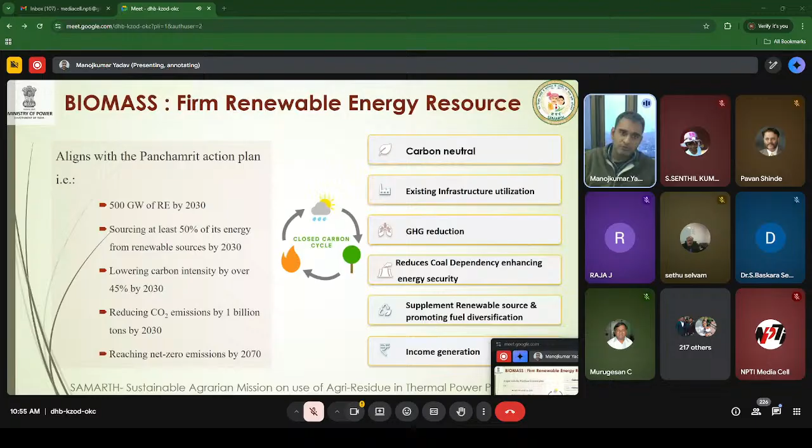और बायोमास का दूसरा नुकसान है जो जलाते हैं, उसको भी टैकल कर पाएंगे हम. और इस प्रोसेस में फार्मर्स के लिए और अदर स्टेक होल्डर्स के लिए एक इनकम जनरेशन का भी सोर्स है. सो दिस वाज द क्रक्स कि हम व्हाई वी आर मूविंग टुवर्ड्स बायोमास कोफायरिंग.

फिर क्वेश्चन ये भी आ सकता है कि भाई अगर बायोमास से ही कोल रिप्लेस करना है, तो हम एक पूरा ही बायोमास का प्लांट क्यों न लगा दें, व्हाई वी आर नॉट. तो एक है कि इंडिया का जो इंस्टॉल्ड कैपेसिटी है दैट इज अराउंड 217 गीगावाट थर्मल पावर प्लांट, 17-18 गीगावाट का है. अब ये एक बहुत बड़ा इंफ्रा है, आप इसको ऐसे वो नहीं कर सकते.

इसको बनने में भी बहुत टाइम लगा, ओवर द पीरियड ऑफ 50-60 ईयर्स वी हैव ग्रोन। तो इसको आप इतना जल्दी रिप्लेस नहीं कर सकते, और एग्जिस्टिंग इंफ्रा है, उसमें कैपिटल इन्वेस्टेड है।

बेस लोड के लिए अगर आप ग्रिड ऑपरेशन पॉइंट ऑफ व्यू से देखें तो आपको थर्मल पावर प्लांट और हाइड्रो प्लांट्स की रिक्वायरमेंट है, क्योंकि जो रिन्यूएबल है उनके कुछ चैलेंजेस हैं जिनको हम थर्मल और हाइड्रो प्लांट्स यूज करके कैटर कर सकते हैं। तो ये हमारी रिक्वायरमेंट तो है ही।

तो हम 100% फायरिंग के बजाय को फायरिंग करें तो उसमें हम एग्जिस्टिंग इंफ्रास्ट्रक्चर यूज कर सकते हैं। 100% अगर नया पावर प्लांट लगाना है तो पहले उसका लैंड इंफ्रास्ट्रक्चर पूरा नया से शुरू करना पड़ेगा, और इनका कंप्लीशन पीरियड भी बहुत बड़ा होता है, तो बहुत टाइम लग जाएगा। मतलब इम्प्लीमेंटेशन विल बी ए चैलेंज अगेन।

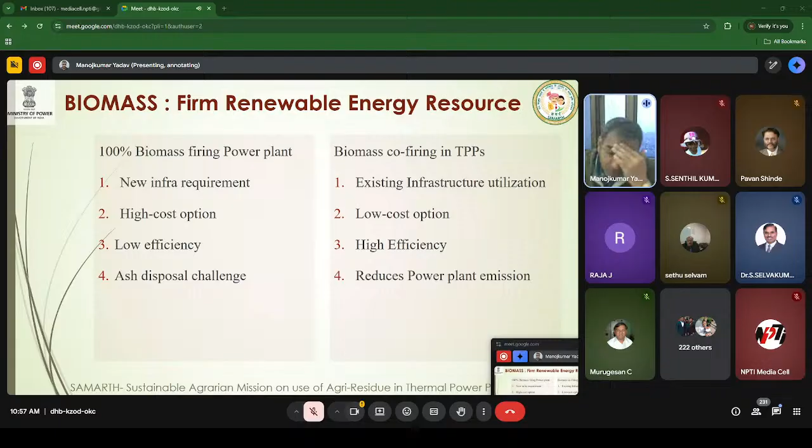ये एक हाई कॉस्ट ऑप्शन है क्योंकि आपको जीरो से स्टार्ट करना पड़ेगा, एफिशिएंसी भी लो रहती है, और उसमें एश डिस्पोजल के अलग चैलेंजेस हैं। जबकि आप एग्जिस्टिंग थर्मल पावर प्लांट में यूज करोगे तो जो एमिशन का प्रॉब्लम है, जो ग्रीन हाउस गैस एमिशन की हम बात कर रहे थे, वो आप कैटर कर पाओगे।

जस्ट टू गिव अ आइडिया कि इंडिया का बायोमास का जो अवेलेबिलिटी है वो कितना है। अगर आप देखें तो ये 2019 का डेटा है, 230 मिलियन मेट्रिक टन ऑफ सरप्लस बायोमास जनरेशन है।

अभी मिनिस्ट्री ऑफ पावर ने एक और स्टडी कराई है जिसमें इट इज स्टिल नॉर्थ ऑफ 200 मिलियन मेट्रिक टन पर एनम जनरेशन है बायोमास सरप्लस का। तो कहने का मतलब है कि इट इज गुड इनफ। जो हमारा ऑब्जेक्टिव है को फायरिंग का, उसके लिए सफिशिएंट बायोमास अवेलेबल है।

अगर पूरा इंडिया का जो इंस्टॉल्ड कैपेसिटी है कोल बेस्ड थर्मल पावर प्लांट का, वो को फायरिंग स्टार्ट करे एट 5%, तो उनको ऑलमोस्ट 40 मिलियन मेट्रिक टन पर एनम जैसा लग जाएगा। विच इज मतलब 20% से भी कम है जो सरप्लस बायोमास अवेलेबल है।

तो द पॉइंट इज कि रॉ मटेरियल का इशू नहीं है इस केस में, जो हम इस डायरेक्शन में मूव कर रहे हैं। ये जस्ट आइडिया देने के लिए है कि अगर इंडिया को फायरिंग 10% बायोमास में स्टार्ट कर देता है, तो अलग अलग स्टेक होल्डर्स इन्वॉल्व हैं, जैसे फार्मर्स, पैलेट मैन्युफैक्चरर्स, थर्मल पावर प्लांट्स - सो हाउ मच इन टर्म्स ऑफ मनी, हाउ मच इज द मार्केट।

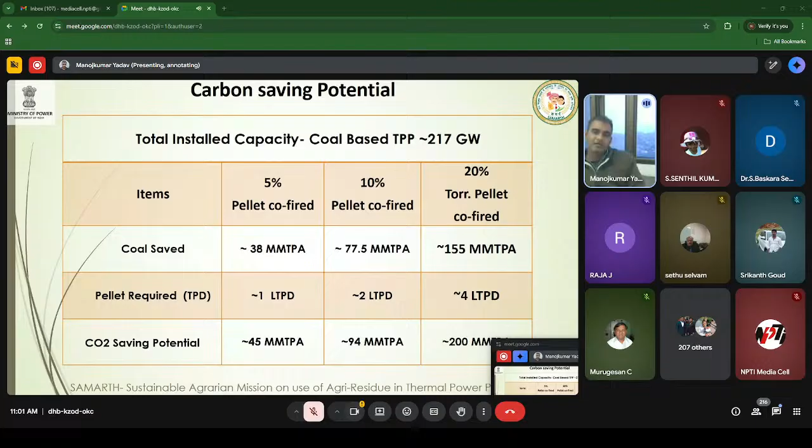अब हम आ जाते हैं policy पे। मैं एक request करूंगा, जो मेरे बाकी presenters हैं, policy mostly मैं cover कर लूंगा। in case आपको ऐसा लगता है कि ये repeat हो रही है आपके presentation में, तो आप उसको थोड़ा सा skip कर सकते हैं, so that हम to the point बात करें और time को optimize कर पाए।

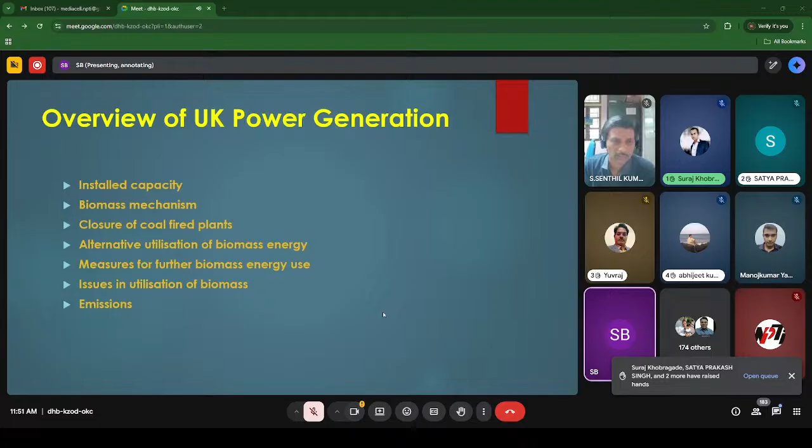If you see the UK's installed capacity, it's roughly 70 to 75,000 megawatts in total. Initially, the coal-fired plants in 1996 comprised about 25,000 megawatts, and slowly it has come down to only 5,000 by 2020.

Now in 2025, no coal is being used here in the UK. The data is not available after that, so I couldn't add it. So there is no coal, and the oil fired is the one shown in yellow, and the gas fired, mostly combined cycle power plants, and some mixed and dual fuel fired plants which are thinning down over the period, and nuclear stations which are more or less the same, roughly 4,000 to 5,000 megawatts. Then hydro, which is smaller, and pumped hydro, onshore wind, offshore wind, wave and tidal, solar, and the red one is biomass.

From 1996, it was very, very small, but over the period the share has increased considerably. Some of them, like other biomass fuels, are waste energy fuels which we are using here at the top. So this is the trend you can see here.

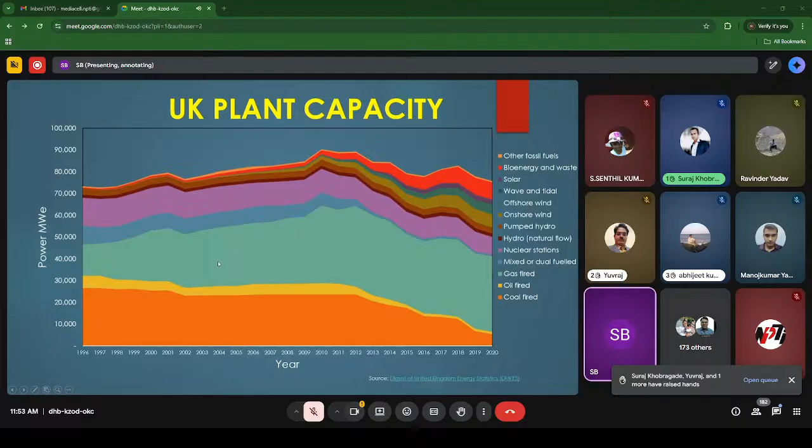And this is the fuel which is currently on that. There's a grid which is there. If you go to the UK grid, you can find out the current amount of power generation.

Currently, even though we have about 75,000 megawatts, the demand is only 26,000, maybe 27,000 megawatts roughly, and out of which the renewables are contributing about 43%, which is 11.5, and some carbon neutral sources giving 12.25 gigawatts. That means the carbon emissions have been considerably coming down, almost 89% of the projects coming from carbon neutral basis.

The nuclear is 3,600 megawatts, combined cycle 14,300 megawatts, and biomass is 2,870 megawatts, which comprises about 11%. This biomass is working more or less as a base load, and over the day as we progress from morning 6 o'clock to 12, this load will increase and reaches about 50,000 megawatts.

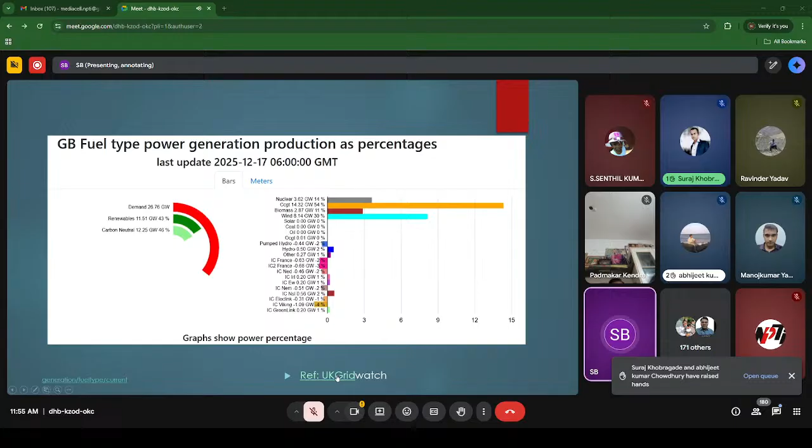Whatever I explained, the same thing is here in a kind of dial, and you can see from here the demand, renewables, carbon neutral fuels, nuclear, combined cycle, biomass, wind, and solar, and all sort of thing.

Because it's morning, there's no power generation from solar. In coal, there is none, and oil, there is none. Open cycle, there is no power. Pump storage is being used for pumping, that's why it's showing negative at the moment. And hydro plants are giving about roughly 500 megawatts. So that's the kind of situation.

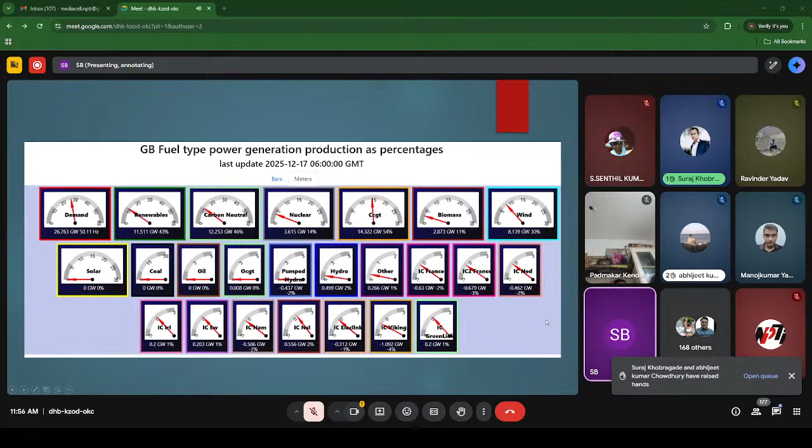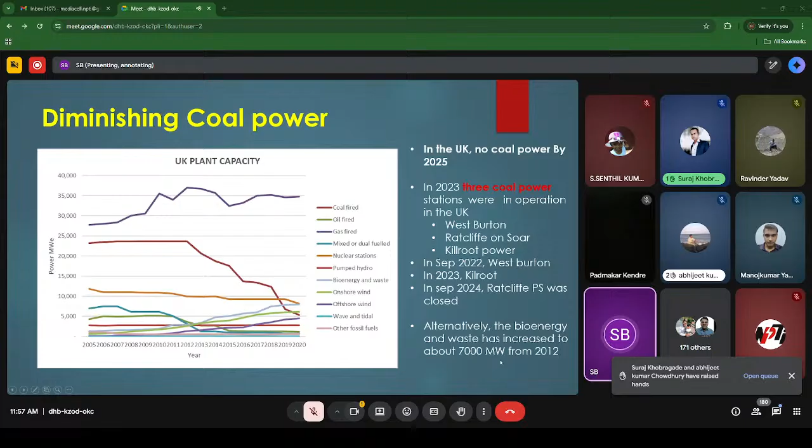As I mentioned, there is no coal power in the UK as of today. There were only 3 power stations: West Burton, Ratcliffe, and Kilroot, and all the plants have now been shut down. The biomass and waste has increased now to 7,000 megawatts since the 2012 figure.

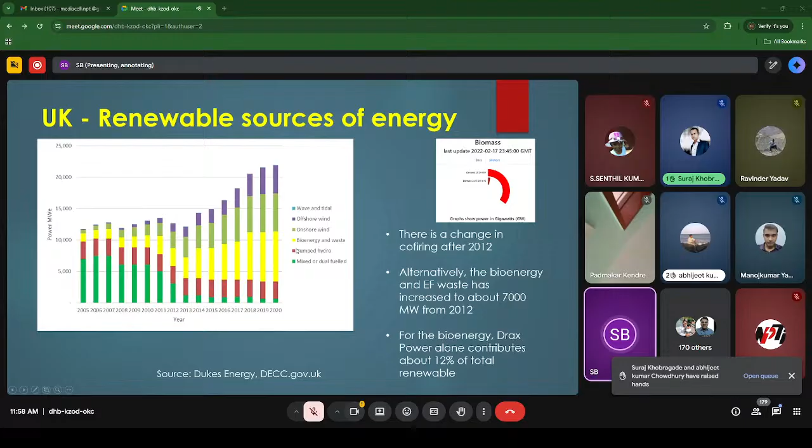UK renewable sources, if you see here, biomass is not considered only a renewable source, other than the bioenergy which is there. If you see that yellow one, the total contribution has considerably increased over the years from a smaller amount in 2005 to 2020.

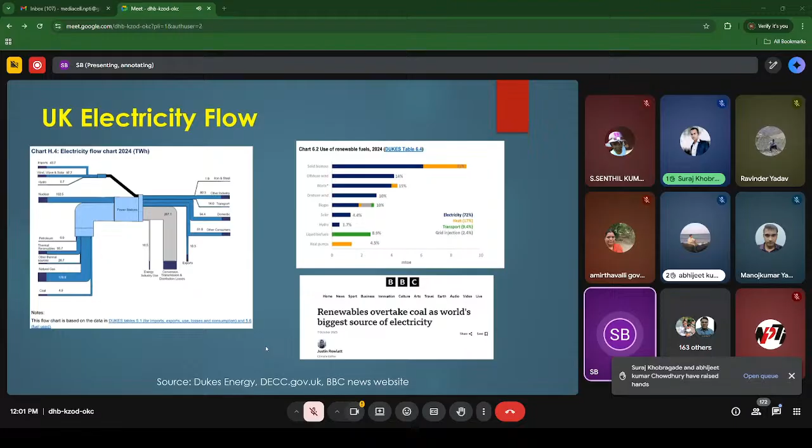If you see this BBC report, renewables overtook coal as the world's biggest source of electricity on 7th of October 2025. That means all the energy generation coming from renewables is constantly changing from coal, and this is also evident from the various agreements provided at COP30 and other conferences, where they are increasing the use of renewables to mitigate carbon dioxide emissions and improve the situation on global warming.

So we have discussed all of that, so I'll just skip this.

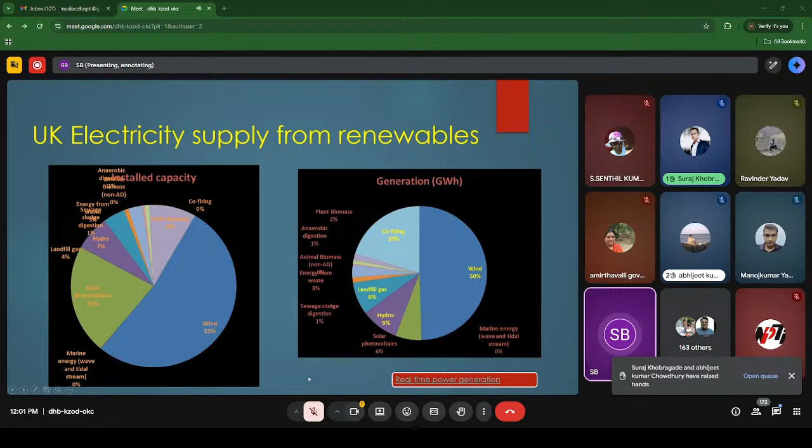In terms of co-firing technology, many people would have discussed this earlier. There is direct firing, indirect firing, co-firing, and dedicated firing. In the UK, we have worked mostly on co-firing and dedicated firing technologies, and hardly use direct firing, though we have used some projects on indirect firing.

Let us talk about direct co-firing. You take the coal from the bunker and the biomass, and use it in the same coal mill. The mixture of coal and biomass is put together into the coal burner, and that burner is combusted in the boiler so the energy is used. But you have to note that this biomass is without any processing, so whatever you are collecting, you are collecting it with the coal milling.

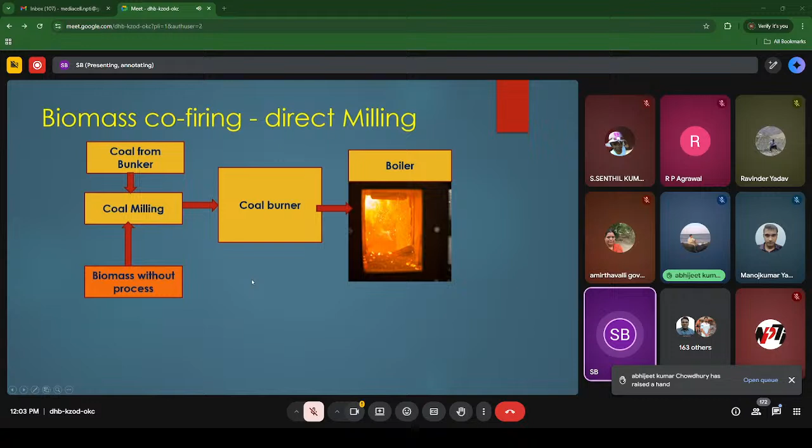But coal milling has certain characteristics for milling coal. If you are putting the biomass without any classification, it is not that effective. So direct firing is considered only for very low quantities, whereas the biomass involved is not that much in terms of quantity.

In co-firing, biomass milling is done separately and coal milling is also done separately, and the milled products are passed through the same burner, which is a biomass and coal mixed burner, and then it will be passed to the boiler.

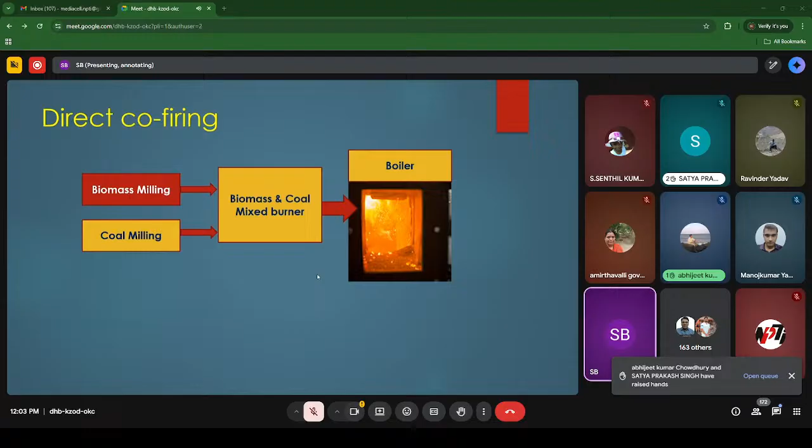Dedicated biomass burning is generally being envisaged. In most of the projects I've been involved in, we have used dedicated biomass co-firing because we wanted to achieve roughly about 20% co-firing in the 500 to 600 megawatt range. For that purpose, we need roughly about 100 megawatt generation from the biomass, and separate milling is needed for that.

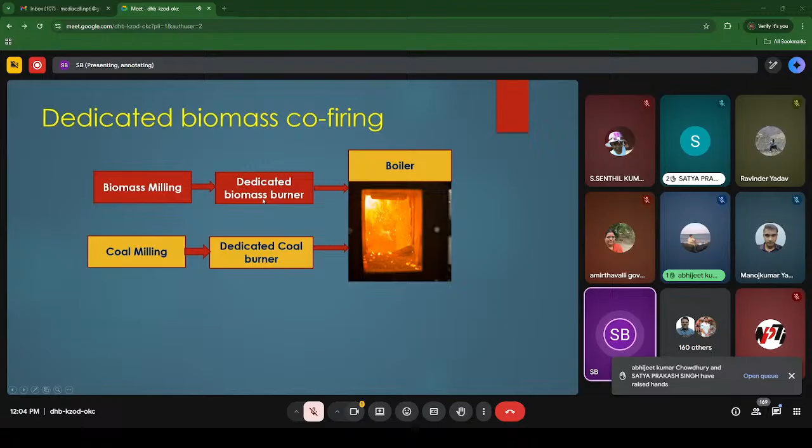The milling is different from coal milling because coal mills are not suitable for such a large volume of biomass milling. So separate biomass milling is there, and all the milled biomass is stored in a dedicated silo, then passed through a dedicated biomass burner, while the coal milling, as in a usual thermal power plant, goes to the coal burner. So the layer of the burner is introduced within the same furnace, and some modification is needed to accommodate this dedicated biomass burner for the power generation requirement.

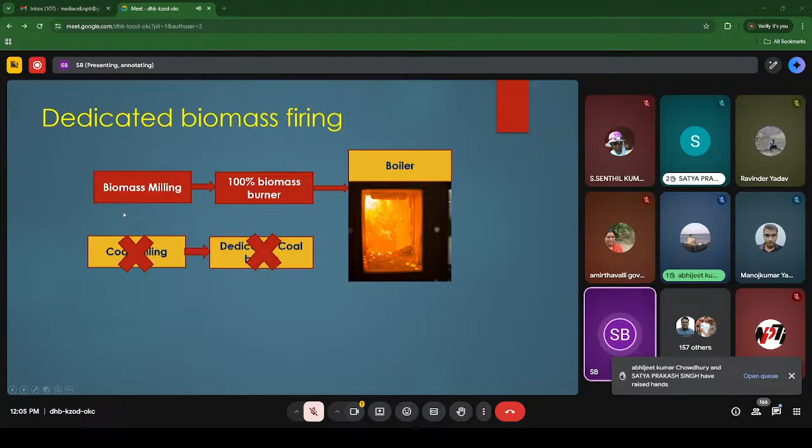In dedicated biomass firing, which is commonly used here currently, we completely take out all the coal milling and coal burner, and instead use 100% biomass milling and 100% biomass burner, which is currently being used in one plant in the UK.

When you are considering co-firing options, the factors you need to consider are: if you're retrofitting an existing power plant where the plant is already online, versus building new plants, you have to consider these factors separately.

Retrofitting an existing plant is cheaper, allows limited co-firing, and offers a quick turnaround for modifications, where you can have a plant coming online very quickly.

You need to carry out biomass characterization, which is critical, because most of the time whatever you're testing at the time of utilization will be different from what you're actually using at site. So you need various biomass collections, analyze all the biomass and their ingredients, what they contain, and then appropriately use the technology and combustion systems to cover this.

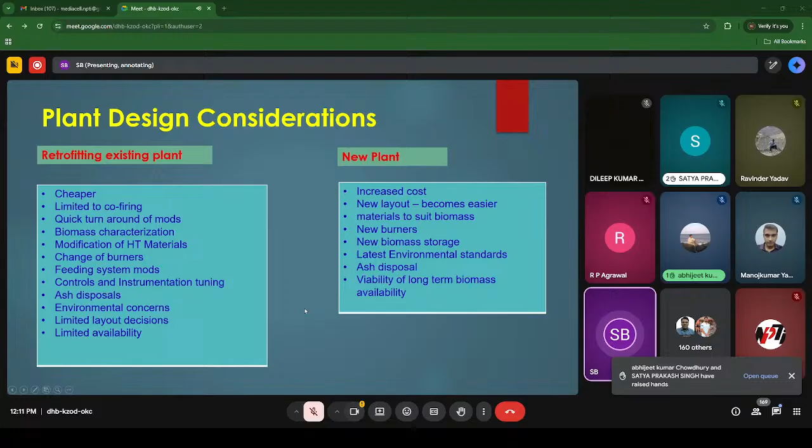The only thing you need to watch is the long-term availability of biomass, because sometimes biomass availability can be an issue, as it may be available only in certain seasons and not in others. So you need to execute long-term contracts, and that will be the key for biomass.

There are some issues and remedies we've addressed, basically biomass sourcing. As I mentioned in my previous slide, that may be an issue. You need proper sourcing mechanisms ensuring the biomass characteristics match your plant, and considering availability—if it's available, is it easy to transport or not? That's another issue.

Sometimes you need to take the fuel from the source, which may be hundreds of kilometers away, and the transportation cost for taking out that biomass source may be very high, and that will be affecting your project as well. Based on this, you need to see the economical and financial efficiency of the plant when you're converting into biomass co-firing.

Within the plant, what we have done is we collect the biomass and develop the nature of the fuel in terms of physical and chemical characteristics, check with the existing layouts and plant equipment, and check the suitability of that fuel for the thermal and mechanical aspects of the boiler, the heat generation, heat pickup, and then determine what components need to be replaced and what can be used without much replacement.

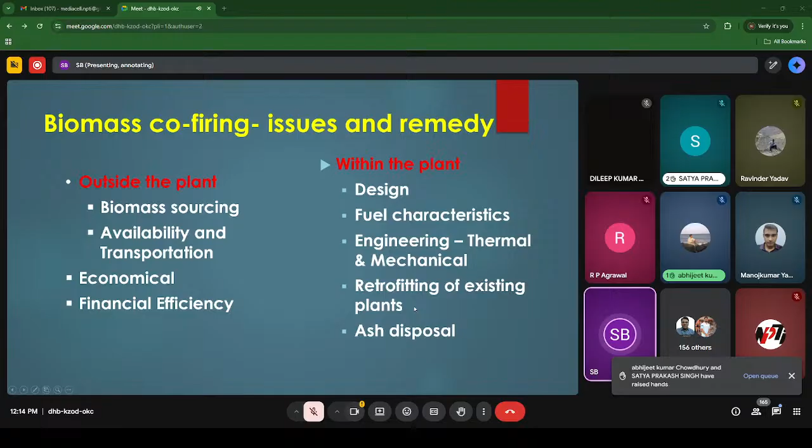When you're converting to this biomass co-firing plant, the basic list is you have to do some due diligence on where you're getting the source, what kind of contract it is, whether it's short term or long term, and how you ensure the characteristics are being matched, and all the fuel-associated diligence you need to carry out.

When you are doing it with the existing plant, you need to carry out hazard and operability studies and hazard identification, so that when you're using the biomass, you understand how it impacts the safety of the people, safety of the plant, and safety of the components, as well as safety of the environment. You need to identify and mitigate any issues identified, keeping risk as low as possible in terms of any hazardous situations.

You need to check the layout and introduce the biomass storage. You need a new pathway for bringing the biomass to the site, developing, delivering, and storing it, then going for the milling. After milling, you need some storage, and then it will be passed through to the different burner arrangements. So you need proper asset management on this.

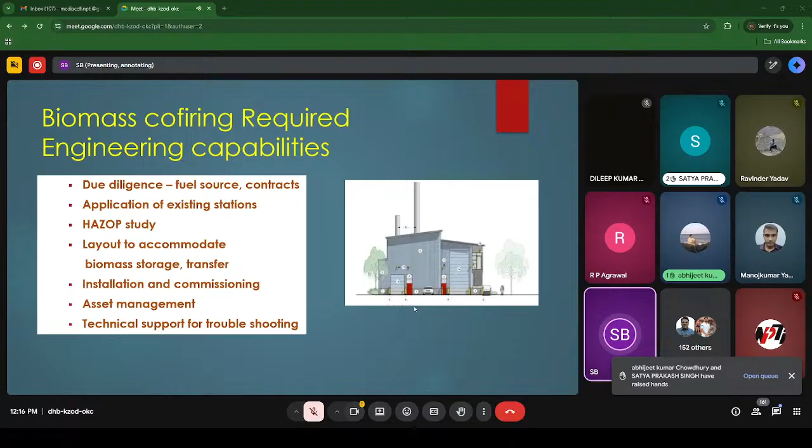When we are using biomass in the UK, since we don't have only dedicated biomass firing, for fuels coming from waste we characterize both, and then try to use them as much as practical. I consider this slide as biomass-based fuel.

When you're going for biomass, you can have combustion, pyrolysis, gasification, and biogas anaerobic digestion — those are the areas you can use biomass. For waste, you can use combustion, or instead of pyrolysis you can go for incineration or gasification, and the remaining waste which can't be processed further goes to landfill. Even some waste can be used for biogas generation.

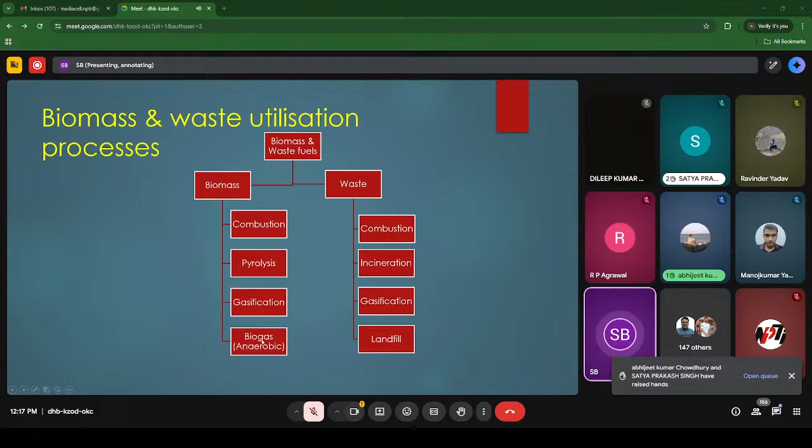When you're co-firing biomass with other fuels, it can be chips, logs, pellets, pulverized — all sorts of forms you can use. When working with coal-fired plants, most coal-fired plants in India are pulverized fuel based, and some are not, but they can be used with chips and pellets. All you need is to match the existing burner arrangement and combustion arrangement. You may collect it in terms of chips or anything, but you need to make the pulverization suitable for the conversion.

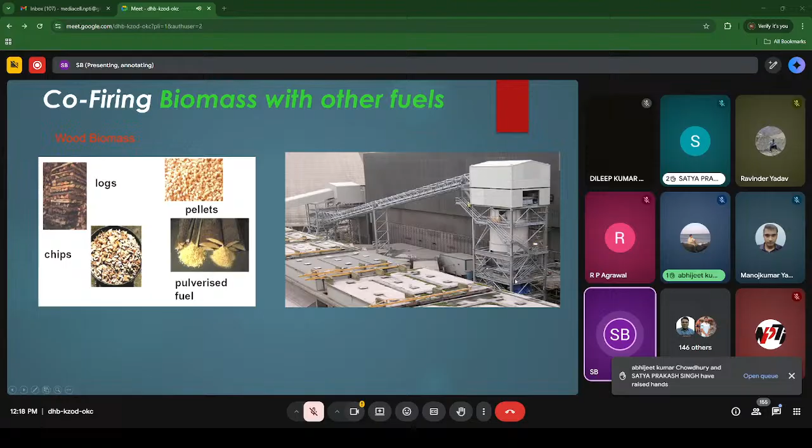In this picture, you can see the biomass coming in, and then it will be carried over and put into storage, and that storage will be used again for milling and other purposes.

I worked on a few projects. One is called Fiddler's Ferry, where we have 20% co-firing, and another Ferrybridge where we have 20% co-firing. I also worked for Drax, which is 100% biomass conversion, and did some studies on Longannet, Aberthaw, and Ratcliffe power stations in the UK. But those plants are now closed. Even though closed, I want to give a glimpse of how this is done at Ferrybridge.

This is the boiler and this is the furnace. In the existing furnace, there is a burner box with a tangential firing arrangement, so the burners are located across tangentially, and the pulverized fuel pipes pass through and take it to the burner box. A number of burners are arranged there, used for combusting the pulverized coal, fired tangentially.

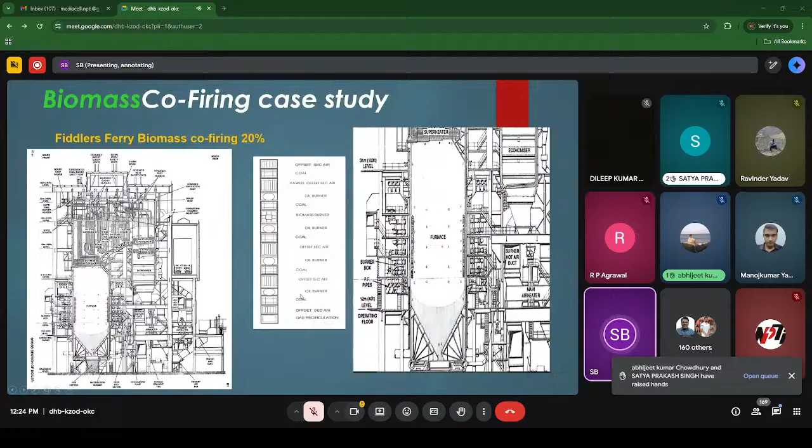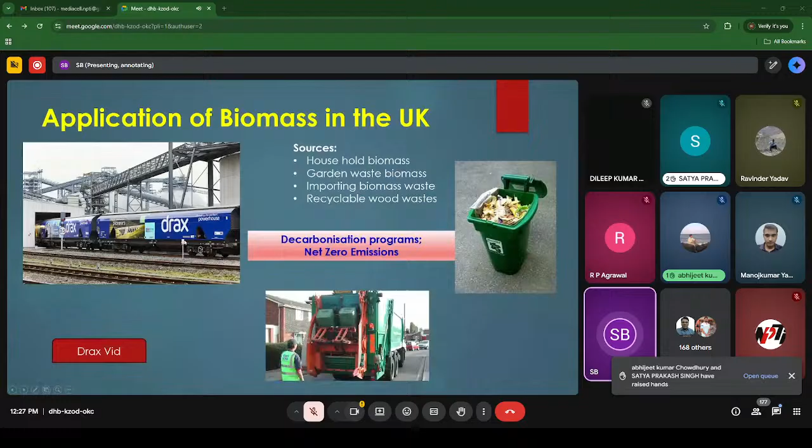For the biomass, since, as I mentioned, it is a 4,000 megawatt unit, and they don't have the biomass, what Drax has done is made long-term agreements with some manufacturers in Canada, America, Brazil and other places. They develop the biomass, convert it into pellets, and these pellets are transported by sea, come to the nearest seaport in the UK, and from that seaport, trains collect this, and then it comes here. So every day you can see these biomass collection trains collecting, and then the goods vehicles passing it to the plant.

In order to get this biomass going, without government support, it cannot be done. So what the government has done is provide some direct support and some indirect support. Some of the direct supports are they provide some initial demonstration plants. They have spent on R&D, working on various projects on how this reacts, and then they come up with commercial situations. And another important thing is the landfill levy.

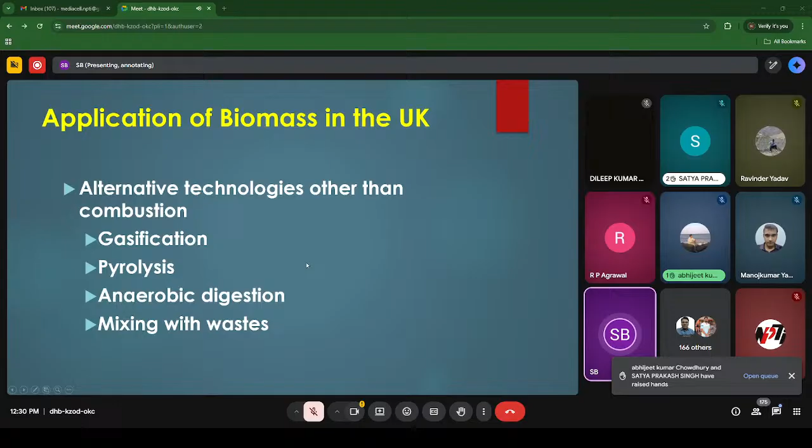Okay, so the applications I've already discussed: gasification, pyrolysis, anaerobic digestion. I know most of the audience is well aware about these processes and the different types of conversions, but if you have any further questions, please contact me. I'll be happy to answer.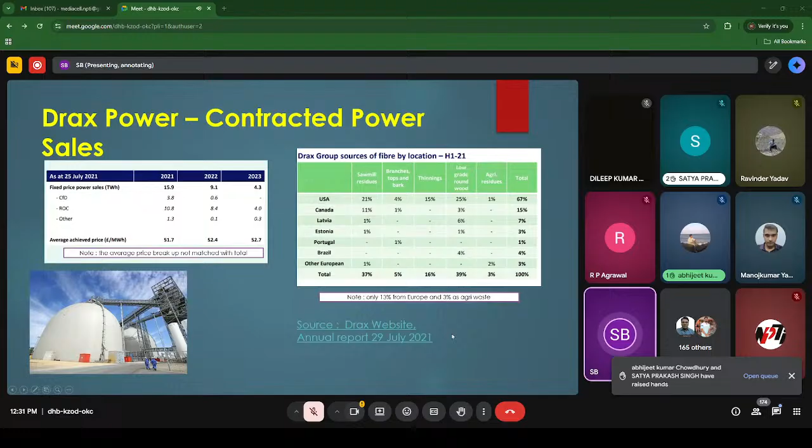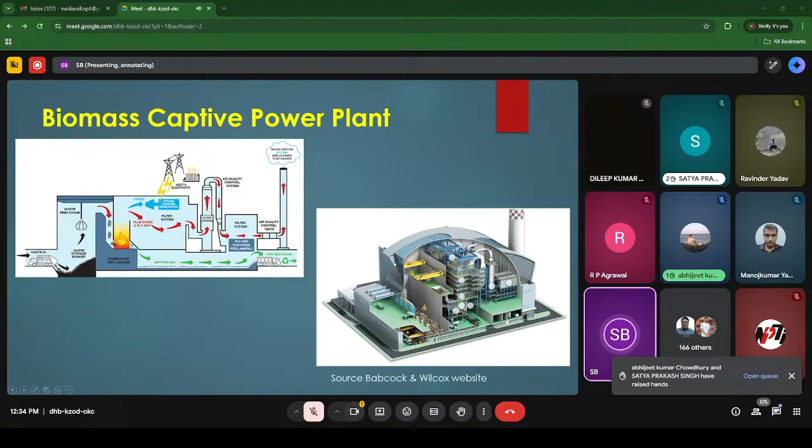Another thing is anaerobic digestion, but I'm not covering that here because we're mostly talking about co-firing.

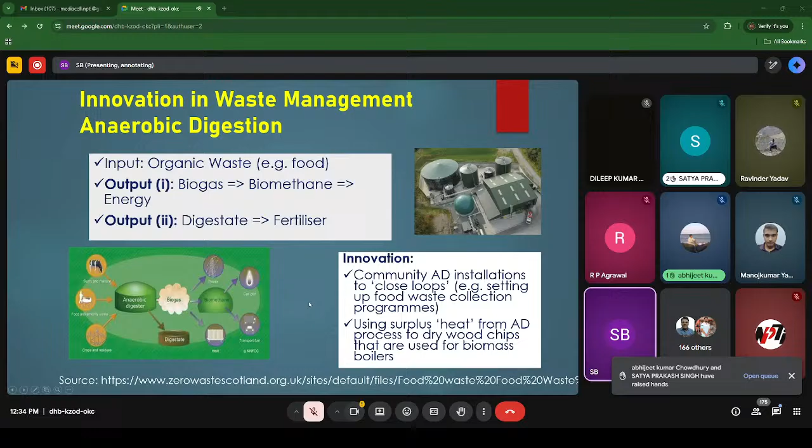Last but not least, the recommendations. What I find is that cost-effective mechanisms should be used, and in India, it's already the nature that we use biomass as a domestic fuel for cooking and other purposes, so we don't really use such fuels on a large collective basis.

But at the same time, some agricultural mass burnings are reported every now and then, especially in the Delhi region, where it causes pollution and other issues. So that kind of biomass, we can source and use effectively in power plants. The SAMARTH mission actually encourages such kinds of things to provide...